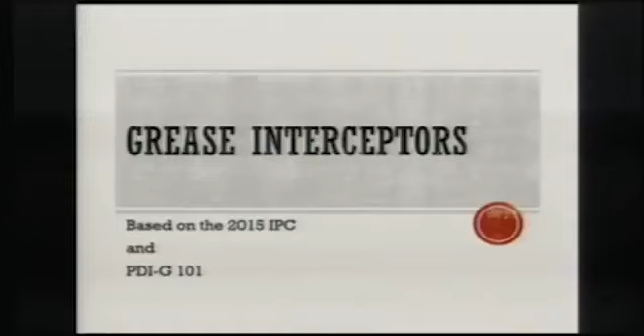One other thing, and I think this gets forgotten, is that if you're out there installing grease interceptors, it's like any other piece of plumbing you're doing - it requires a plumbing permit. So if you get a restaurant that calls you and asks you to install a grease interceptor because these folks told them they need one, don't forget to call us at Code Services. We need a permit, and we'll inspect it after it gets installed. So ask questions as you go. Most of you have been to one of my classes before. I like lots of questions if you have them - we'll try to answer them, and if we can't, we'll find an answer.

Okay, there's two types of grease interceptors we're going to talk about. I'm kind of tied to this microphone, so since we're recording this, I can't wander around like I usually do. But there's two types of grease interceptors that the plumbing code recognizes.

The first one is called a gravity-type grease interceptor. That's what you'd commonly hear people call in-ground. They're the big tank types that go in the ground outside the establishments. They are typically at least 500 gallon, and they work by a process which allows that liquid to stay in that tank for a long enough duration.

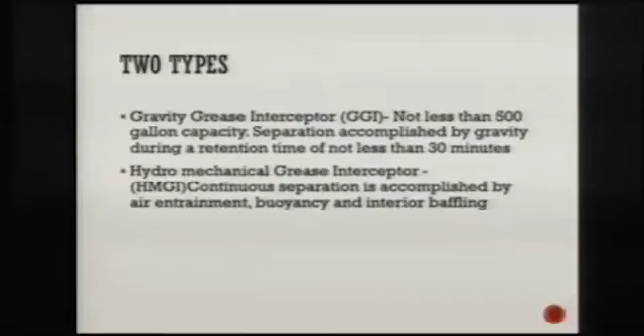These actually aren't very complicated. Again, they just work by allowing that liquid that flows in to sit in there long enough for that grease to separate before the liquid hits the outflow.

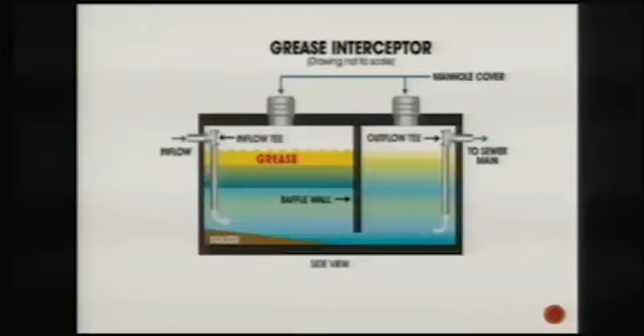Just a picture of a gravity-type grease interceptor. They can be pretty big. The minimum size is 500 gallon, but these can go well over 1,000 gallon or bigger if necessary.

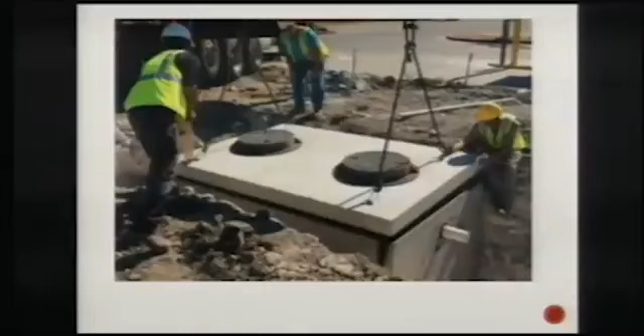Same sort of thing right there. You see the manhole covers on the top for access for pumping, maintenance, cleaning, that sort of thing. So again, not too much to these really. They're fairly simple pieces of equipment, not rocket science.

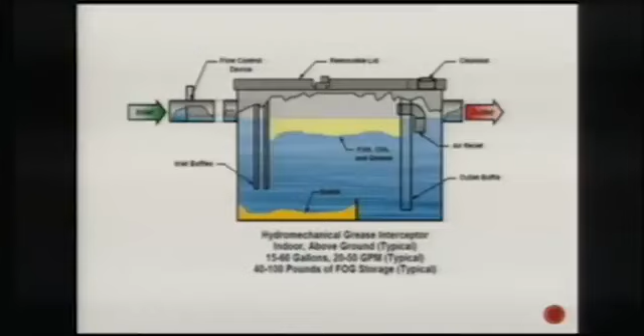So, questions on those two types? Pretty clear? Okay.

This is just another hydromechanical type grease interceptor. Those of you that have opened these, pumped them out, and looked inside will understand this. Each manufacturer has a different way of manufacturing their grease interceptors to trap the grease. You see this one has some very unique baffles, and then there's a perforated screen in the middle that provides extra air entrainment as that liquid goes through to help separate the grease.

The point being, when you open these up to inspect them and they're pumped out, they're going to look different depending on the manufacturer. They're not always the same. In fact, from manufacturer to manufacturer, many times they're quite different, as you can see if you look at this one and then that one. There's a pretty big difference in how those two are manufactured.

Those baffles can also be removable, so you can pull those screens or baffles out to clean them in some cases. I think sometimes over the years when some of these hydromechanical types have been there a while and they've been opened, every once in a while you'll find that one of those baffles got removed and somebody never put it back in again. Well, that's not going to be as effective now as it would be. It's not going to work the way it was designed. So you might check for that.

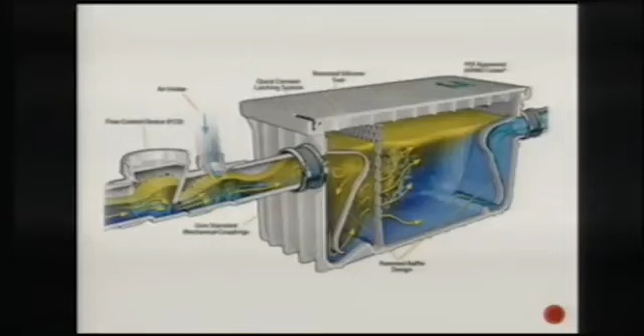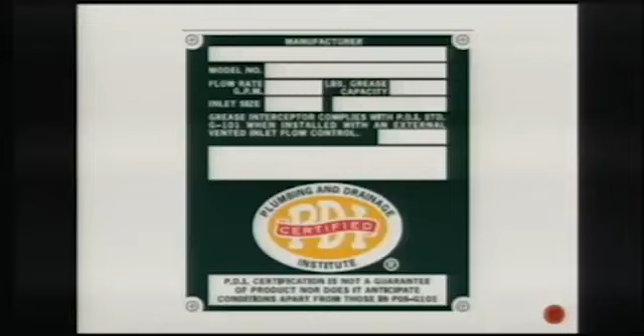I threw this one in because, again, those of you that have worked with these would know this is a typical label that will be on a hydromechanical grease interceptor. It'll have the flow rate in GPM - gallons per minute - the grease retention capacity in pounds, the inlet size, and there may be some other info, but when we're out inspecting these, that's some of the essential info we're going to look for. When I talk in a little bit about how we size these things, that information becomes pretty critical.

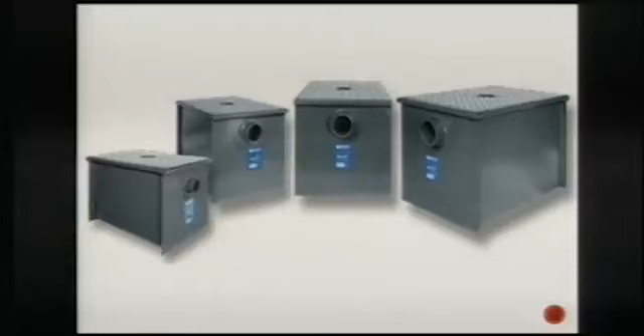Here's an example of different sizes, everywhere from small to pretty big on the hydromechanical ones. The gravity ones can be many, many times bigger than these, but you can get whatever size of these you want within the range that they manufacture them. It's all based on how much grease that establishment is going to generate down the drain, and how often they want to clean those.

Really, you can get by with a smaller grease interceptor if you want to clean it out more often. If you've got something that retains 60 pounds of grease, you're going to have to clean it a little less often than something that retains 40 pounds - one's a little bigger than the other. That's a choice that the establishment and the owner of the property have to make when they install these. But there's a minimum size, though certainly you can go bigger if you want to.

Now, I said we were going to talk about the flow control device on these hydromechanical interceptors. This is required by the code, and in fact, almost all manufacturers of these hydromechanical interceptors that I've seen require a flow control device on the inlet side of the interceptor. It doesn't look like much. You see this one, there's different looks to different ones, but when it's installed, it's not much more than a coupling in the pipe with a vent opening at the top. But what that does is control the flow of the liquid into that interceptor so you don't wind up with an overflow or excess amount of flow.

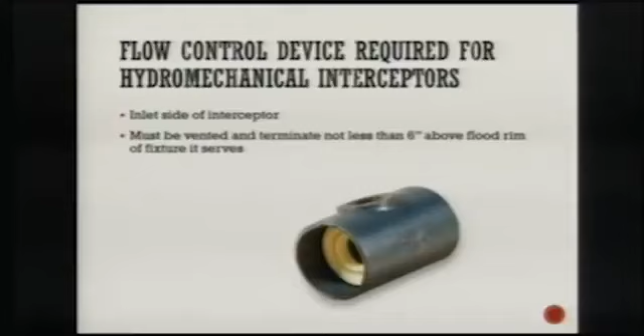So, flow control device required, vented either 6 inches above or tied back into your plumbing vent system, one of the two. Again, if you're just inspecting these, not installing them, just make sure they have flow controls and that they're vented. Questions on that? Okay.

We get the question, code gets this question, I think utilities gets it once in a while too: how often do you have to clean one of these things out? Well, nowhere does it say you have to clean it out. I think there is something in our ordinance now that says that, but how often you clean them really is also based on how much greasy waste goes down them. The more you pour or wash down that drain, the more often you have to clean them to get them to work effectively.

It's also worth noting, probably, when you open that interceptor up to look in it and inspect it, look for obstructions in the inlet pipe, the outlet pipe, maybe in the baffles, anywhere things can get stuck, because as we all know, solids materials get washed down the drain, whether it be food chunks or whatever else, and those things can wind up clogging those inlet and outlet pipes or parts of the interior of that interceptor. So another thing to check as you're looking inside those is that all of the pipes, screens, and baffles are clear of debris.

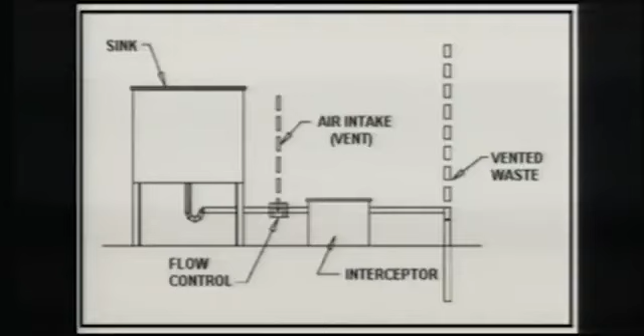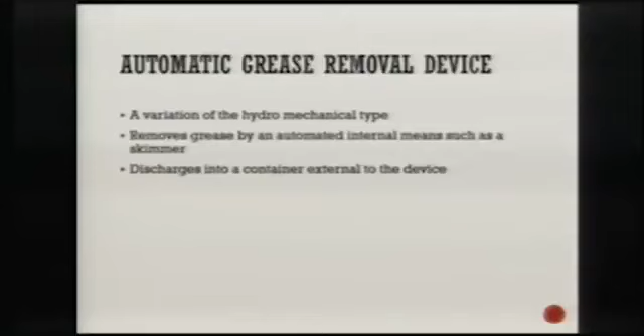Threw this one in because this is not a different type of grease removal device, but it's a variation of the hydromechanical type. It's called an automatic grease removal device. It's a hydromechanical interceptor that has an automatic internal means of removing the grease. Usually it's some kind of skimmer that's in there, and it will actually skim the grease into an external container. Here's a picture of what one might look like.

Again, you'll see them installed in the same locations as you would any other hydromechanical, but they essentially are just collecting the grease in an external container that winds up having to get emptied on some kind of regular basis whenever it fills up. So with these, there's not a ton of difference, with the exception of that automatic skimmer device in there that skims that grease off and pumps it to that container.

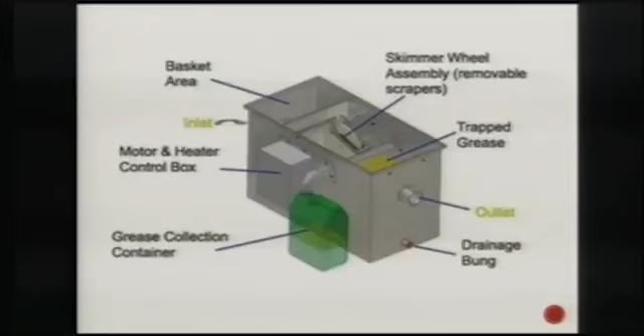This may be the single biggest question we get from everybody at least at the code office: where do I have to put a grease interceptor? Well, the code requires them anywhere that you're going to have grease-laden waste. It excludes dwelling units and single-family dwellings, so apartments and houses and things aren't required to install grease interceptors. But pretty much anywhere else that has a kitchen that might generate grease-laden waste, if it's commercial, it's probably going to be required to have a grease interceptor of some type. Not all, but most of the time.

The kinds of fixtures that we would see that would wind up going into the grease interceptor - I took this wording right out of the code: pot sinks, pre-rinse sinks, soup kettles, woks, floor drains, or sinks into which kettles are drained, auto hood wash units, and dishwashers without pre-rinse sinks.

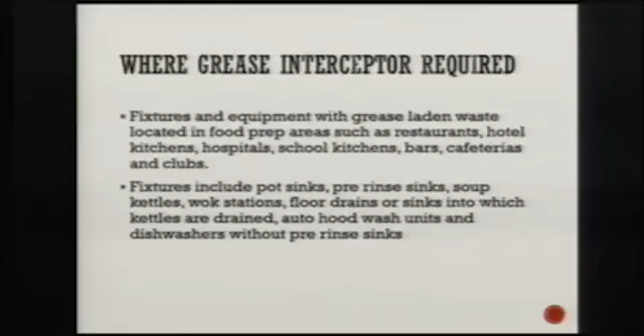So we get that question a lot. Do I have to connect the commercial dishwasher to the grease trap? It depends if it has a pre-rinse sink or not before the dishes go in the dishwasher. So if it does not have a pre-rinse, then you do need to run it through the grease interceptor. If it does, you don't.

Now, where is it not required? Again, grease interceptors are not required in individual dwelling units or private living quarters, so houses, duplexes, apartment buildings, all that sort of thing. Also, I think people sometimes get the idea that, well, we'll just run everything through the grease interceptor, that way we'll be sure to catch everything, right? And that's not really a good idea, because the code actually says fixtures that don't contain greasy waste shall not be routed through the interceptor.

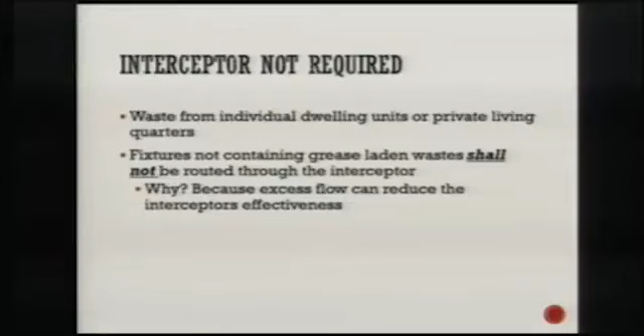The reason for that is because if you have too much flow through that interceptor, it's going to reduce its effectiveness. You want just the right amount of flow in there to trap that grease, and anything in excess of that may wind up washing some of that grease through that interceptor if you have excess flow. Other things, water closets, bathroom fixtures, hand sinks, lavatories, things like that, we don't want to see going through the interceptor. So what goes through there just needs to be the fixtures that are going to potentially generate the grease, fats, and oils.

Food waste grinders, garbage disposals - we'll want those to go through the grease interceptor, but they're required to have a strainer at the fixture. So make sure those have a strainer or solids interceptor at the garbage disposal or food waste grinder.

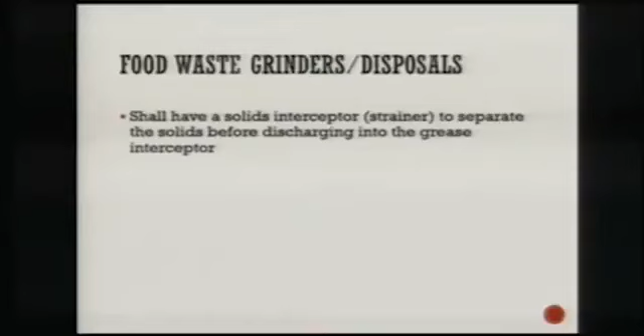I'll skim through this a little bit because it's really not related to inspecting these, which is the purpose of this whole class. But I did want, especially for the plumbers in here who might be installing these, I wanted you to be aware of how these things are sized. When somebody comes to us and says, hey, so-and-so hired me to put a grease interceptor in, how big do you want it? Well, there's really not that much to it.

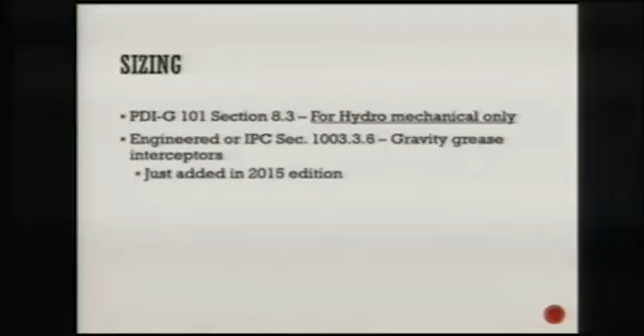PDI, the G101 standard, actually has a couple of different ways you can size hydromechanical grease interceptors. The first one of those, and the one I like to use that's about as simple as it gets - PDI has this table in there, and it essentially strictly works off of the size of the inlet pipe for the hydromechanical grease interceptor. So if you have a 2-inch or less inlet to this grease interceptor, you want a grease interceptor that's a 20 GPM.

Now, that number comes from the maximum full flow of a 2-inch pipe. A 2-inch pipe, unless it's got a whole bunch of head pressure to it, is going to flow probably a little under - I think if you calculate it, it's about 19.5 GPMs.

So what it's doing is that grease interceptor is being sized for the maximum flow that you could get out of the size of pipe that's connected to your inlet.

The other part of sizing grease interceptors is GPM and grease retention capacity. The grease retention capacity on these, I have found, is typically twice the flow rate. So for a 20 GPM hydromechanical grease interceptor, the grease retention capacity is going to be 40 pounds. For a 60 GPM, it's going to be 120 pounds grease retention capacity. So you'll see on the labels of these interceptors that you just double the flow-through rate, and that's the grease retention capacity. Questions on that? That's the easy way.

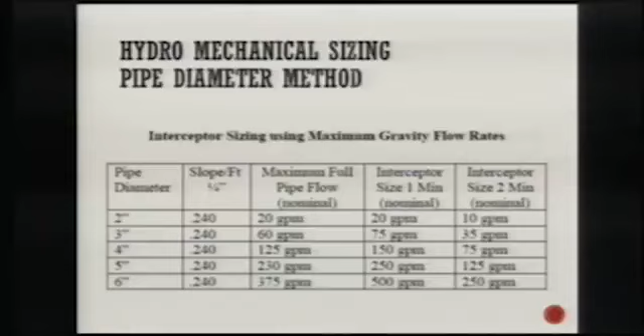Somebody calls and says, I'm going to put one of these in. Well, what's your inlet size? 1.5 inch, 2 inch? Okay, use a 20 GPM. You want to go bigger, you can, but just don't go smaller than that.

Here's the other way, and I'm not even going to start explaining this one, but basically what you do is calculate the volume of every fixture that's connected to that interceptor, and then use that amount of liquid capacity to make sure your flow rate is equal to what's actually connected to it.

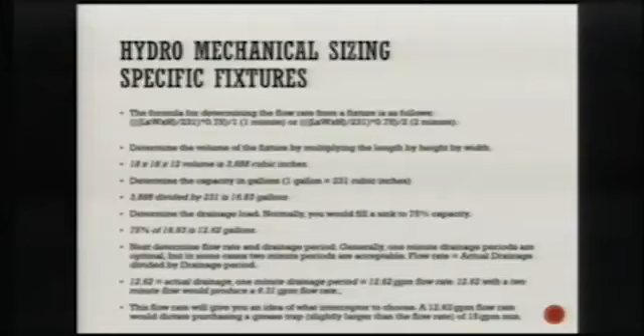To me, you can use this if you want. If you want to get a copy of PDI G101, it's free. You just go to the PDI's website - I downloaded a copy a long time ago and printed it off and put it in my code book. So if you guys want a copy, simple as going to their website and printing it off. PDI G101, testing and rating procedures for hydromechanical grease interceptors.

I would suggest that you all get that if you're going to be doing this. It would be helpful, especially if you're installing them. It's really helpful in that respect.

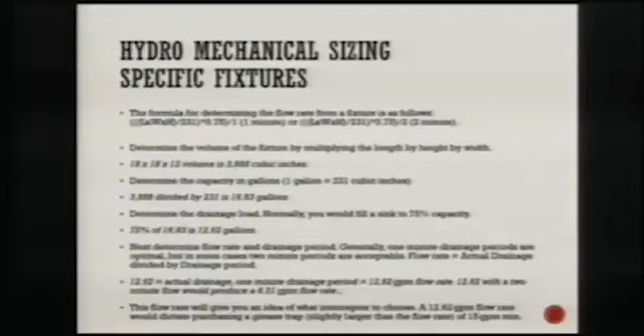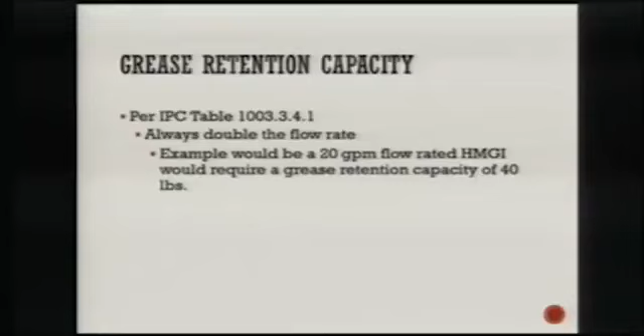Grease retention capacity, as I said, is at double the flow rate. So if you're looking for a 40-pound grease retention capacity, you know you're going to need a 20 GPM hydromechanical grease interceptor. Now, gravity grease interceptor sizing is a little bit different.

It's based on making sure that liquid stays in that tank long enough for the grease to rise by gravity. So what it's assuming is a 30-minute retention time. So really all you're doing is making sure that the max amount of liquid that's going to flow into there will stay in there for at least 30 minutes before it exits the tank.

So, as an example, if you had a 2-inch inflow on a gravity grease interceptor, the flow rate of a 2-inch pipe is 19.44 GPM times 30 minutes. You need a 583-gallon interceptor.

As I said, they can get pretty big. And I don't know that it's worth worrying about this much because almost always when these gravity interceptors are installed, they're engineered. So you guys are installing them based on what's shown on a set of construction plans. The project engineer for a restaurant will specify the particular size of gravity interceptor they want installed based on the fixtures flowing through it. So again, probably not worth worrying about this too much, but it's handy info just to know how those get sized.

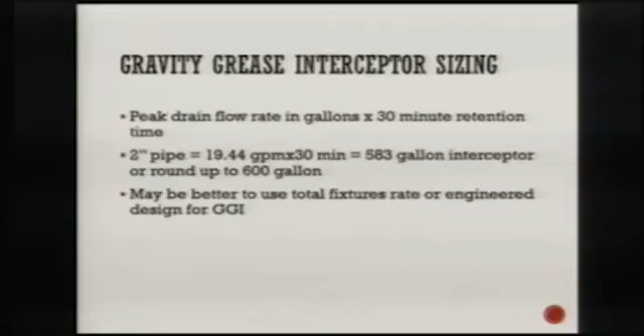That's really as much as I can tell you about grease interceptors, probably as much as you really wanted to know. But questions, anybody, on any of that? It's not really a terribly complicated subject if you just understand how they work. So if you're inspecting, if you know how they work and how they're supposed to be installed, then you can typically take a look and make sure those criteria are met.

So, any questions from anybody? You guys aren't normally this quiet. I'm looking for any questions you got. Nothing? Okay, well, good enough. I'll expect 100% on the test then, right? Thanks, I appreciate you guys listening to me today. Thank you, Brad. Good job.

Okay, as I said, I'm Kevin. I'm kind of the one that oversees the program. And my talk is going to be about program requirements themselves. Let me see if I can get this thing working.

To run the machine, which I obviously don't. So as I said, I'm just going to talk about the program requirements today.

The primary objective of the Grease Management Permit Program is to monitor and reduce the quantity of grease-laden waste discharged to the sanitary sewer collection system by food service establishments.

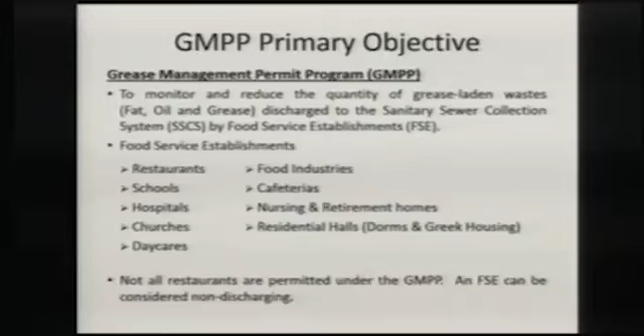Food service establishments can be anything from restaurants, schools, hospitals, churches, daycares, food industries, which I don't believe we have any contributing in Manhattan, cafeterias, nursing and retirement homes, residential halls. Not all restaurants are permitted under the program—there are a few in town considered non-discharging. That's based on how the food is prepared, if it comes prepackaged, what amount of preparation they do, and everything.

Some background for the program. As Abdu mentioned earlier, the first ordinance was passed in March of 2011, kicked off in January of 2012. The whole thing began with the state and EPA directive to reduce sanitary sewer overflows that result in sewer discharges to the environment. It was first adopted in March of 2011, implemented in 2012.

The basics of the first ordinance were to reinforce existing plumbing code requirements for grease removal devices. The plumbing code at the time, and still, requires them in certain applications, but after that there was no requirement for maintenance or anything like that. We got reports that after the inspection, places would remove them so they didn't have to mess with them, stuff like that.

So that was one of the things we wanted to address with the program—also to permit all FSEs that produce grease-laden waste. The permit was more of a vehicle for tracking what was out there and what kind of service was being done to it. We required annual inspections by a city licensed plumber to ensure proper operation and functionality.

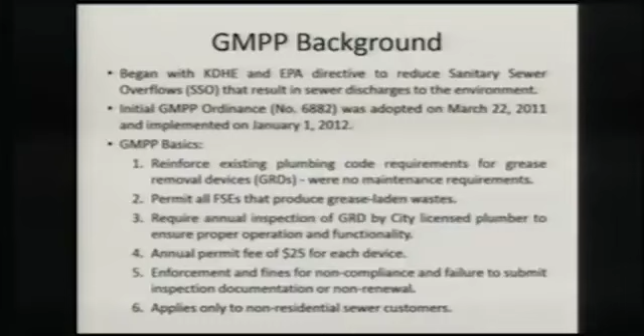There was the annual permit of $25, which the program doesn't pay for itself by any stretch of the imagination, but so anyway, that's that. Enforcement and fines for noncompliance and failure to submit inspection documents or for non-renewal of the permits. And as Brad said, it only applies to non-residential sewer customers—houses, apartment buildings, whatnot didn't fall under the purview of this program.

Some of the consequences of grease-laden waste in the sewer system, and you guys know this more than anybody else, are stoppages, backups, sanitary sewer overflows resulting in human health and welfare issues if you get sewage in a building or anywhere it could come into contact with people.

And of course, who does it impact? Mostly it's the FSE that hasn't been doing the maintenance. They're the first place to experience the overflow because most blockages occur first in the lateral lines before it gets to the sewer main.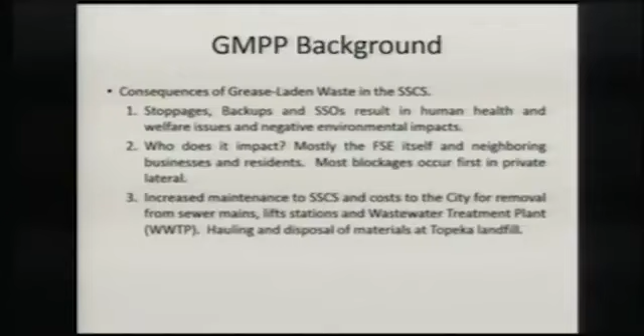Increased maintenance to the sewer system, costs to the city for removal of grease from sewer mains, lift stations, the treatment plant, and then hauling and disposal of those materials to the Topeka landfill. Since this program first went into effect, Topeka has quit accepting that kind of waste, so it's really become an issue for us.

Some statistics of the program from 2012 to 2017, just the number of FSEs and the number of permits—you can see it's increased steadily over the years to this past year when we had almost 180 establishments permitted.

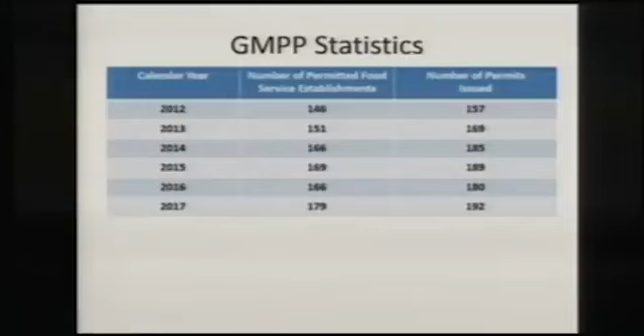As Abdu said, since this was kind of the 5-year anniversary of the program, we did a review—looked at what did work, what didn't work, what our complaints were, and got input from the food service establishments and from you guys.

The first iteration of the program was just a bare minimum of requirements, and it was lacking. The renewal process could be confusing for FSEs, and the most confusing part was that there were 2 dates—the permit renewal date and the inspection date.

When the program first started, most FSEs would get their inspection around renewal time, towards the end of the year. Throughout the years, some places would get them early, some late, until the inspections were strung out all throughout the year and didn't have any tie with the expiration date, and people would get confused. We'd send them a notice of violation for not doing their inspection, and they'd say, no, my inspection isn't due until December the 31st—there was just a lot of confusion.

Consistent failure by numerous FSEs to comply in a timely manner. The permits expired on December the 31st. We gave them a 30-day grace period before we doubled the permit fee to a whopping $50. Every year we'd get 80% compliance by the end of January, and then we'd have to chase all the rest of them around to try to get them to do their stuff.

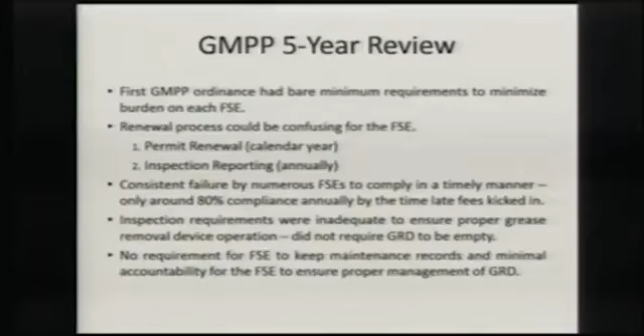This is just an illustration of the confusion with the 2 dates. Buffalo Wild Wings here, the expiration date of their permit, like everybody else in town, was 12/31. But they'd gotten on the ball one year and got it done early, so their inspection was due in June. That's a 6-month offset.

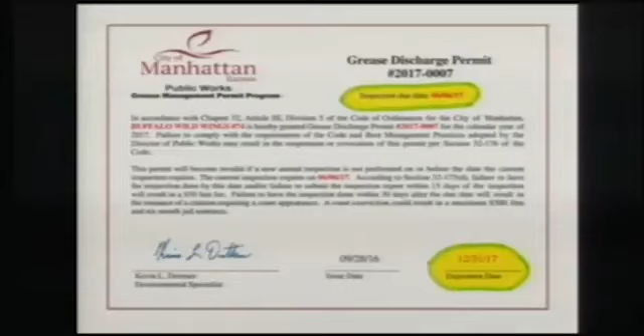Our goal for this new ordinance was to help do away with some of that. Our new permit renewal process starting this year, we did an alphabetical permit renewal system, kind of like how you get your license plates, where A and B have to get their license plates in January, C and D in February, and so forth.

This is to kind of help spread the workload out, instead of everybody getting slammed at the end of the year about needing their grease trap cleaned out, needing an inspection, and that kind of thing. We all know that the end of the year is a busy time anyway.

Annual inspection is still required, but the due date is aligned with the permit expiration date. For an inspection to be valid for permit renewal, it must be done within 60 days before the expiration date of the permit. So for like Applebee's, for example, their permit renewal date is going to be January the 31st, since they start with A.

Their inspection expiration date is also going to be January the 31st. And then there's a 60-day window in there for them to get their inspection done for it to be considered valid. So from the 1st of December till the end of January, anytime in that 60 days.

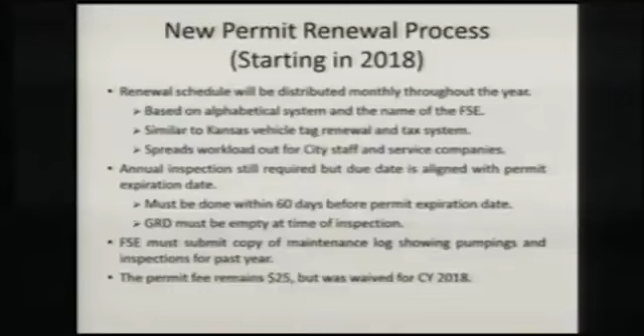This is a graph about how the permit renewals fell in the old system, where the permits all expired on December the 31st. You can see September, October, November kind of just bumped along there, and then wham, in December we had all these renewals, and then January and February and March trailed off there at the end.

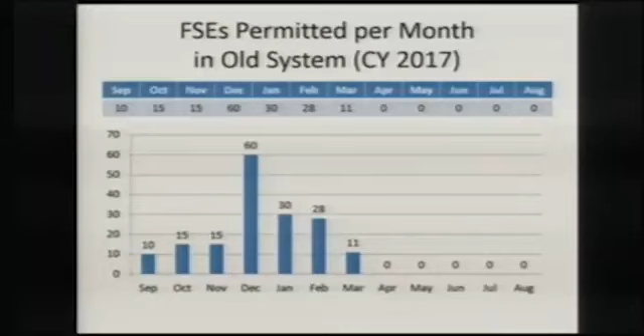As I said, there's a mandatory maintenance interval of 180 days. The old requirement was that the grease interceptors shall be maintained to ensure they operate continually, effectively, and as designed, which really doesn't say anything.

There's an industry standard for maintenance intervals, which is the 25% rule, where they need to be emptied when 25% of the volume is filled with grease and solids. Of course, that requires a lot of measuring, and we don't have the staff to do that.

Like Brad said, the proper maintenance frequency is ultimately dependent on the amount of waste that goes through that thing. So even though it has to be cleaned out every 6 months, that's not saying that's sufficient. And if they need to clean it out once a month, then so be it.